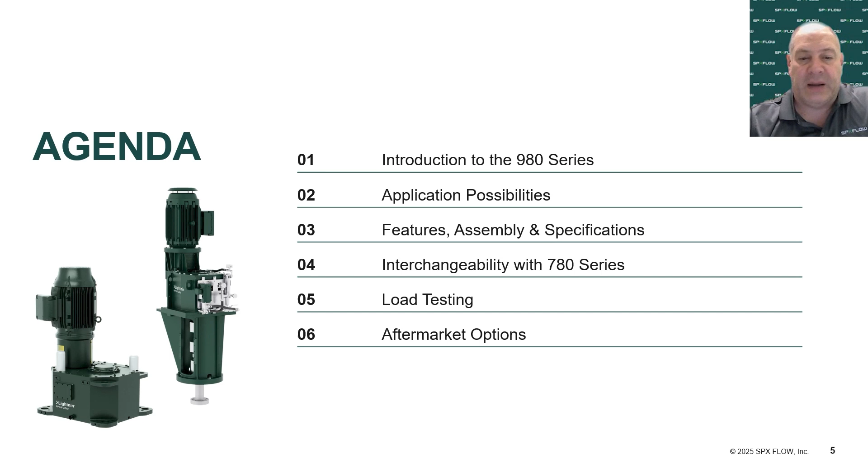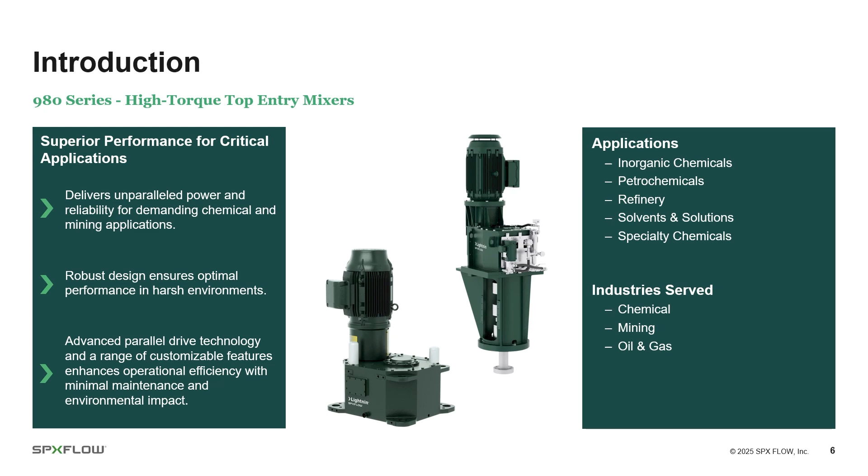For an introduction, the 980 series is a parallel shaft gearbox. It delivers a robust design and advanced technology in customizable features, whether that's the seal that gets used in a process environment or the way that the motors are mounted vertical instead of horizontal. And it is a high torque drive, so applications in many different markets and industries are all possible for this mixer drive.

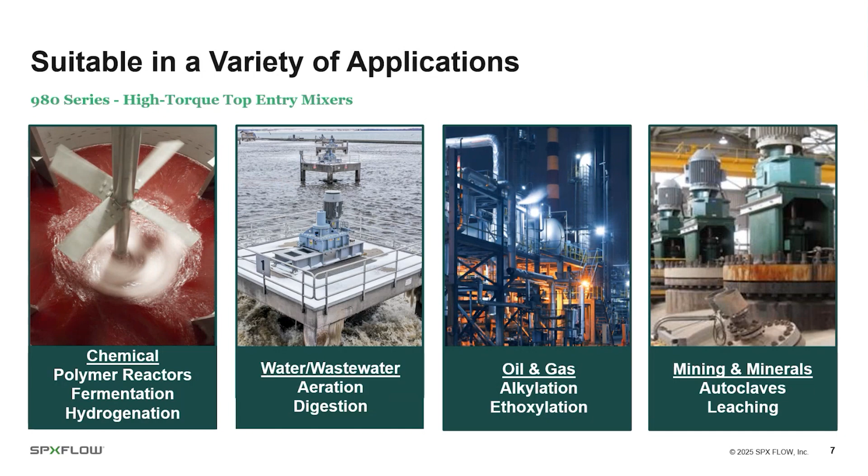As I said, a variety of different applications. The ones that you should think about in the different market areas are, for chemicals: polymer reactors, fermentation, and hydrogenation. For the waste and water market: aerators and digesters. For oil and gas: alkylation and ethoxylation are opportunities for this drive. And then finally, in mining and minerals: autoclaves and leaching environments are also very possible for this mixer.

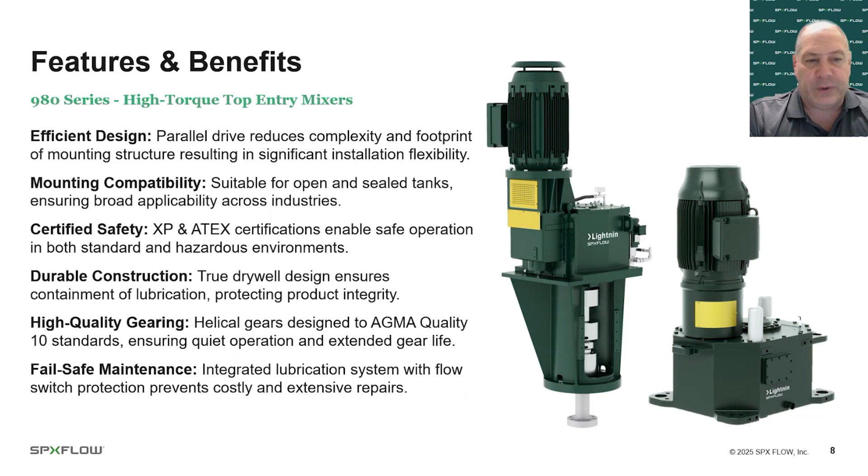A very durable construction of the gearbox and the internals, combined with a true dry well, which is part of the last presentation I did, ensures that there's no contamination of lubrication and you're protecting your product integrity by not leaking any lubricant down the low-speed shaft.

The gearing is all AGMA quality 10. It ensures quiet operation, extended life, and low noise.

And then finally, the lubrication for this gearbox is done with an integrated pumping system with a flow switch that protects the gearbox from any failures of lubrication that would result in costly and extensive repairs.

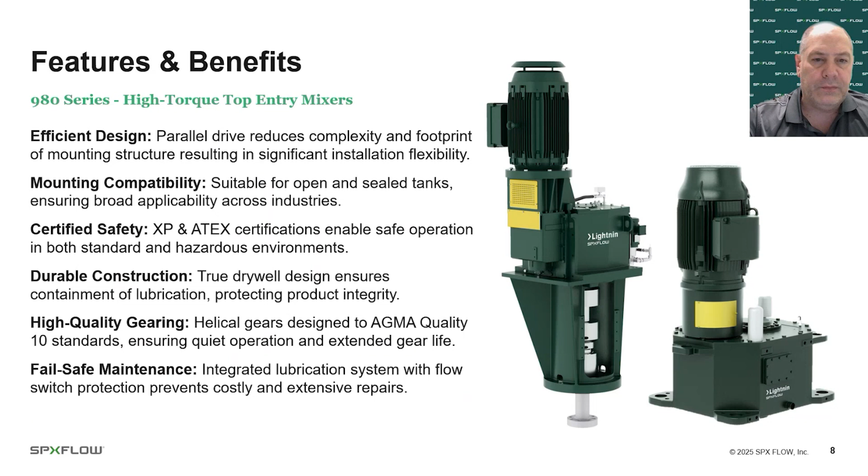The assembly of the gearbox pictured here is quite interesting because we were able to allow the low-speed gearbox mounting feet to duplicate the 700 series of horizontal reducers. So if you needed to replace a 700 series, this 980 series would drop right in.

There is a standard shaft-driven pump with internal piping and an external flow switch for lubrication protection. All of these units are double reduction, all helical design, and there is a very significant amount of speed availability based on using 4, 6, and 8-pole motors.

The motor shaft fan, pictured in yellow here, is standard for the lubrication system mentioned. Both solid and hollow quill output shafts are available. The solid shaft is for open tanks, and that's what's pictured here. The hollow design is for sealed reactors, and the shaft would then slide through the gearbox, allowing you to change the seal or do other maintenance while the mixer was still mounted on top of the tank.

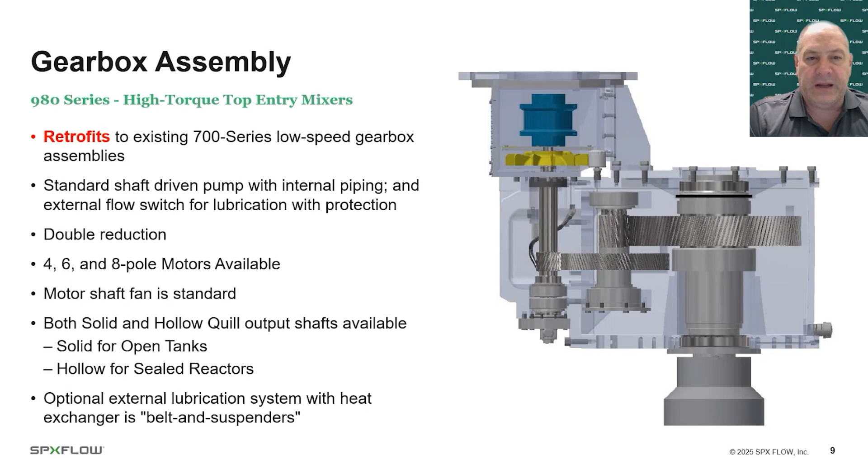Finally, there is an optional external lubrication system with a heat exchanger for a belt and suspenders approach to lubrication, where the application might be critical or fail-safe, and you can't have any lubrication issues with the unit.

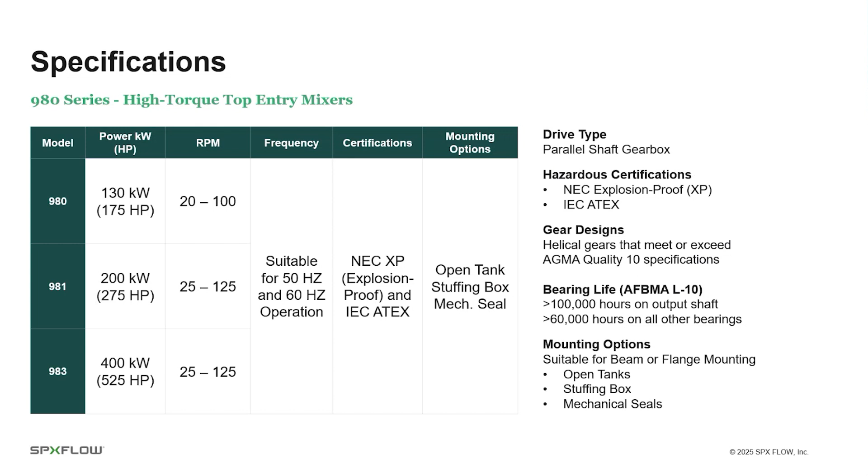Some specifications of the 980 series: the 980, 981, 983 range from about 175 horsepower or 130 kilowatts, all the way up to 400 kilowatts or 525 horsepower, in an RPM range of 20 to 125 for output speed.

These are suitable for both 50 and 60 hertz design operations, so they can be used globally. The certifications are NEC explosion proof and IEC ATEX type designs. So in addition to safe area designs that require no certification, these can be used in XP and ATEX applications.

Mounting options: as we said, it could be mounted on an open tank, incorporate a stuffing box and flange, or use a mechanical seal and flange assembly. A couple other things to mention: the bearing life, the AFBMA L10 life on the output shaft bearings is greater than 100,000 hours in every case, and all other bearings in the drive are greater than 60,000 hours, giving you a long operation time prior to any required preventative maintenance.

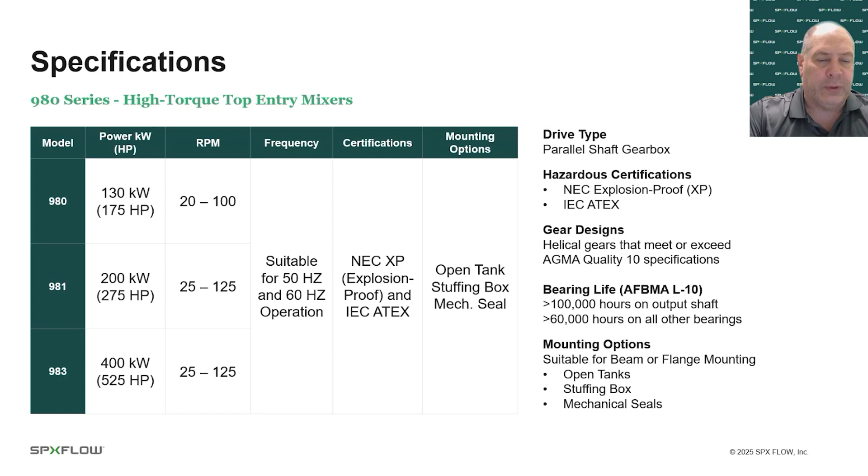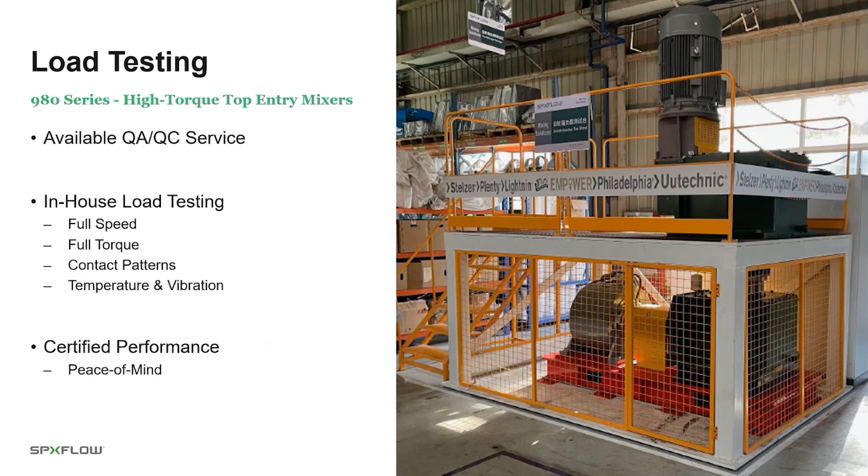Some of the options we offer with the 980 series of high torque drives is Lightnin Lube. Lightnin Lube is an ISO grade synthetic gear oil, and using it from the beginning of the startup of the unit will double the operating warranty for that unit.

We also offer an external lubrication system, which has an external cooling heat exchanger and filtration, to make sure that as a belt and suspenders approach, you are taking care of your expensive asset and making sure process downtime is eliminated or minimized.

Mechanical seals come in many different shapes and sizes. The mechanical seal cartridge for the 980 series can be a Lightnin style C cartridge, an internal bench testable cartridge built by Lightnin mixers. It can also be a Flowserve, John Crane, or EagleBurgmann cartridge or canister type seal, or nothing more than a single seal. All of those would mount on the pedestal below the gearbox, and they would all be maintainable without having to disturb the pedestal or the gearbox.

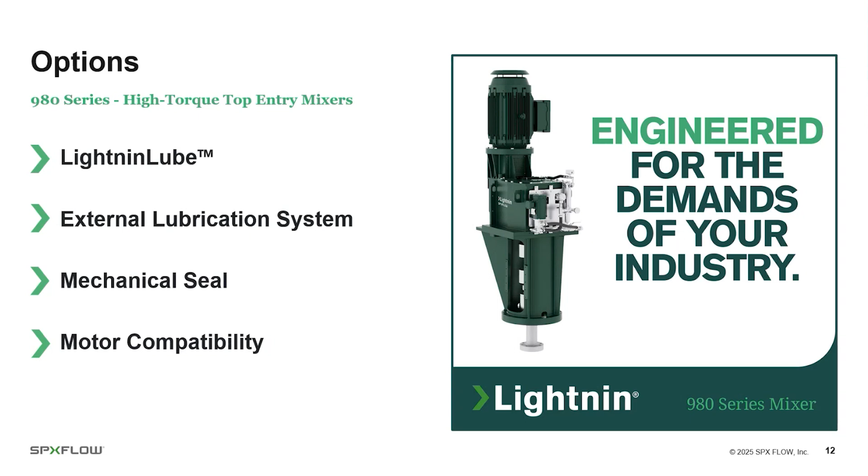And then finally, motor compatibility: the unit is compatible with motors that are C-face, NEMA design, and also IEC frame design.

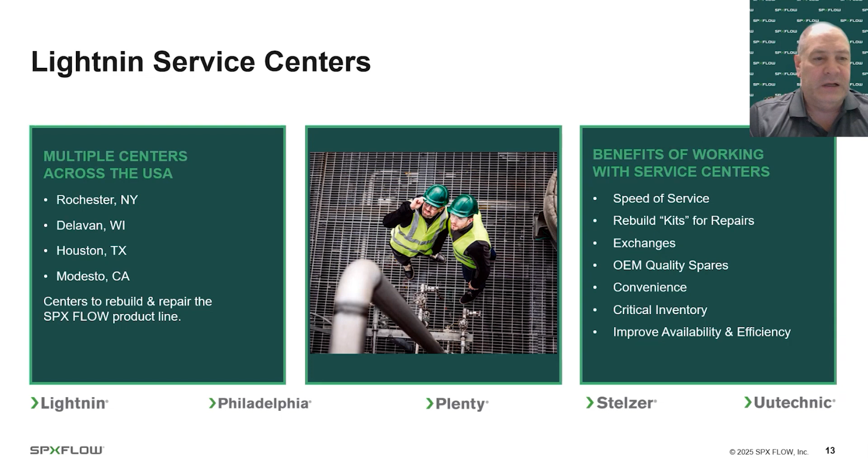Some of the benefits of working with these service centers are the speed of service, the rebuild kits for repairs, access to exchange reducers if necessary, OEM quality spares, convenience, critical inventory storage, and improved availability and efficiency of our service offering. We also have an authorized service provider network across the nation.

This is a service provider authorized to support repair services based on their capabilities and the portfolio of SPX Flow mixing brands. Again, speed of service, OEM quality spares, and local support. Please think of the authorized service provider when looking at maintenance requirements, or when you're not able to get to one of the 4 service centers located across the USA.

Well, this ends today's presentation. I will now begin our question and answer session.